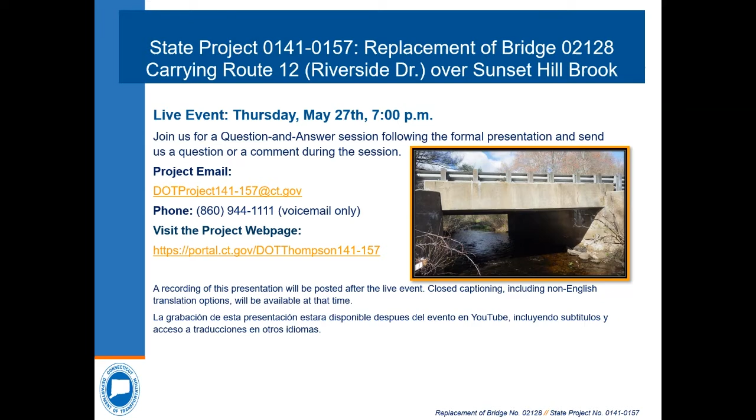Subsequently, as the preliminary design of the project has progressed, we have coordinated with the town to schedule a virtual public information meeting for the project, which brings us to this evening's public presentation. Please understand that coordination with the town, adjacent property owners, and other stakeholders will continue as we advance the project through its design.

Now I'll introduce the project's design team from the Connecticut Department of Transportation. Bart Sweeney, Division Chief of Bridges. Andy Cardinelli, the Bridge Design Principal Engineer. Again, I'm Brian Reed, the Bridge Design Project Manager for this project. And the following individuals will be presenting the project to you in a moment. Raymond Bassar, the Bridge Design Project Engineer. Mikhail Thomas, the Bridge Design Project Designer. And Matt Giannakopoulos, the Right-of-Way Coordinator from the Office of Rights-of-Way. Matt will provide an overview of the procedures followed by the department for right-of-way impacts to properties and property acquisitions.

Following the formal presentation, the project will host a question and answer session, during which time you will have an opportunity to ask the project team questions or provide comments regarding the proposed project. The project is in the preliminary design phase and is therefore subject to possible changes as the design develops. But this evening's presentation will provide you with a good overview of what can be expected. Your comments and questions are a welcome part of our design process and may serve us in the continued development of our design.

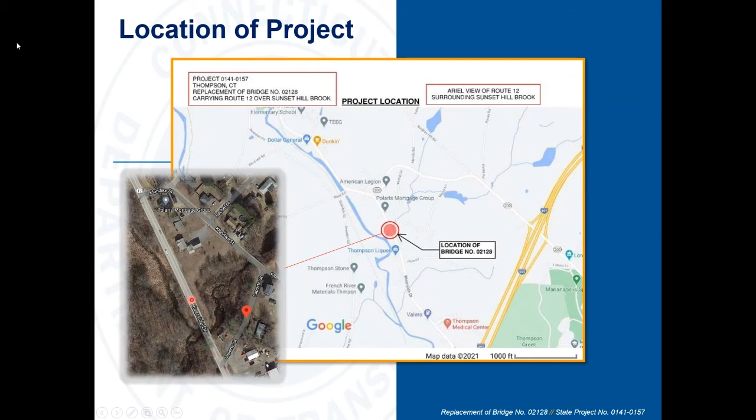What's shown on the screen is an aerial view of the site. The yellow circle shows the bridge location. The bridge is located approximately 1 mile south of Thompson School District.

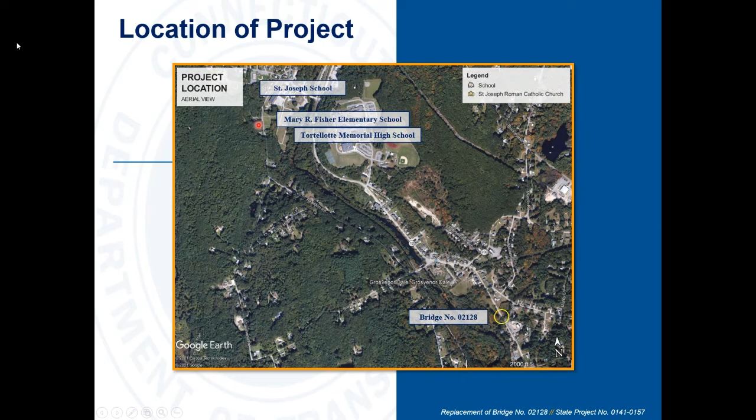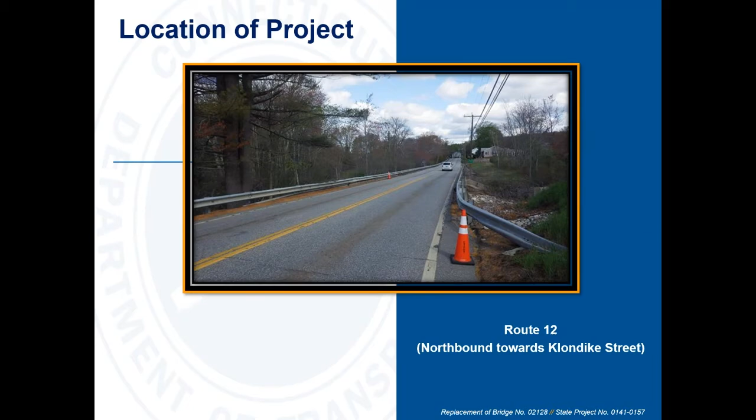The image shown on your screen captures the northbound side of Route 12 and the southern approach to the bridge. This is where the bridge is located. This is the inlet side of the bridge. The image was taken at the intersection of Laporte Street and Route 12.

This view captures the northern approach to the bridge. This is where the bridge is located. On this image, we are looking towards Laporte Street.

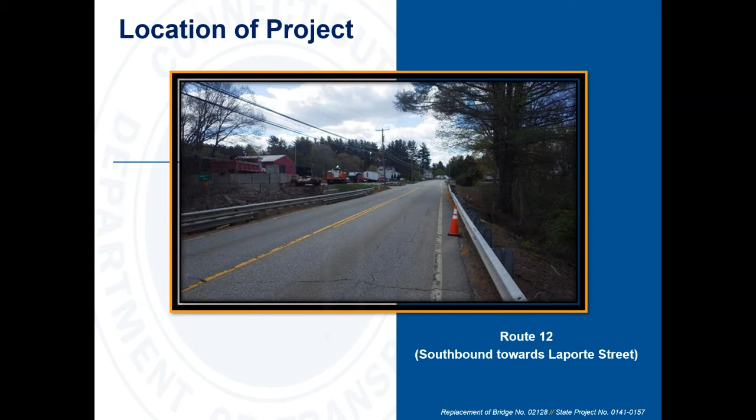Next, I would like to touch on the existing bridge data. The bridge was built back in 1922. It's almost 100 years old, a very old structure. The existing bridge consists of concrete abutments on each side, and a concrete slab spans over the concrete abutments.

In terms of the functionality of the bridge, it carries Route 12 over Sunset Hill Brook with one lane of traffic in each direction. Based on the estimate in 2015, the average daily traffic is 5,700 vehicles, of which 4% are trucks.

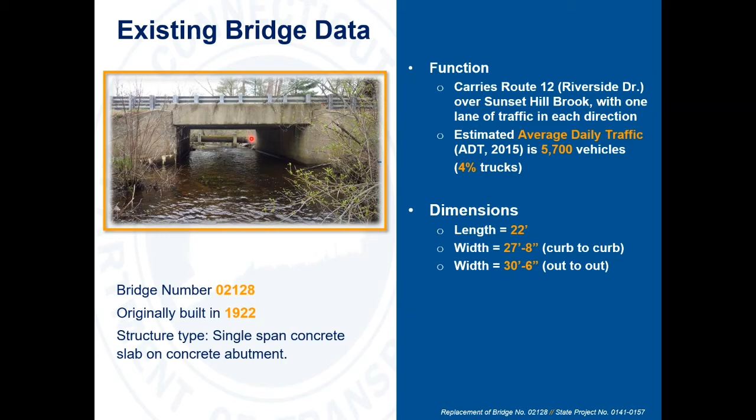As far as dimensions, the bridge is 22 feet long out to out. The overall width of the bridge is 30 feet 6 inches. The width of the paved roadway surface, from curb to curb, is 27 feet 8 inches. There is an existing sanitary sewer line that runs parallel to the bridge, which will be protected and maintained during construction activities. On this slide, I will present the condition of the existing bridge.

There are three major deficiencies associated with this bridge requiring its replacement. The first deficiency is the hydraulic conveyance area of the existing bridge. The conveyance area is shown in a blue box on this isometric view, also defined as the hydraulic opening. The current hydraulic opening is not large enough to accommodate large water passage through the structure.

Due to the proximity with the French River downstream, there is a significant amount of backwater being pushed against the structure from the river. Due to the presence of backwater, the hydraulic design criteria for the 100-year design and 500-year design check cannot be met with the current hydraulic opening. Based on the hydraulic analysis performed by our hydraulic engineers, the existing 18.5 feet of clear span between the abutment faces should be increased to 40 feet so that the bridge meets current hydraulic design requirements.

The second issue associated with this bridge is its structural condition. As mentioned earlier, the bridge is 100 years old, a very old structure. Therefore, the concrete has started deteriorating. Based on a bridge inspection performed in 2015, it was observed that there was large concrete deterioration on the underside of the concrete slab.

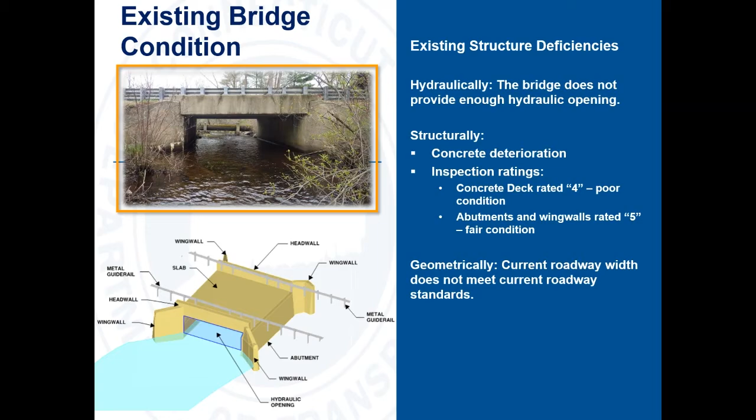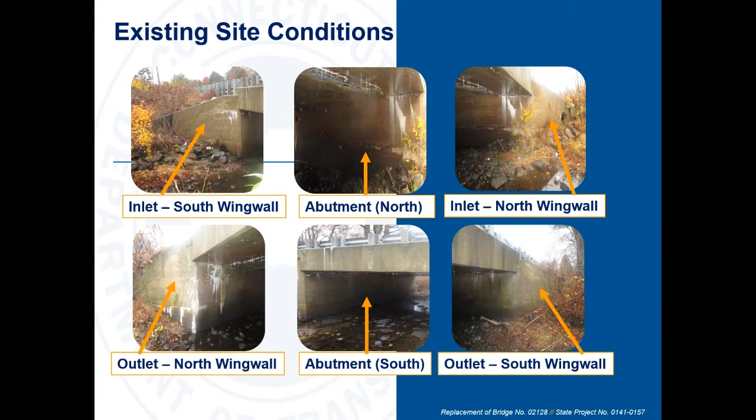There are 6 images up on your screen, taken on the underside of the bridge. These images capture the concrete deterioration, the cracks, and the exposed rebars I mentioned earlier. Our maintenance forces touched up the existing exposed rebars with zinc to prevent further corrosion.

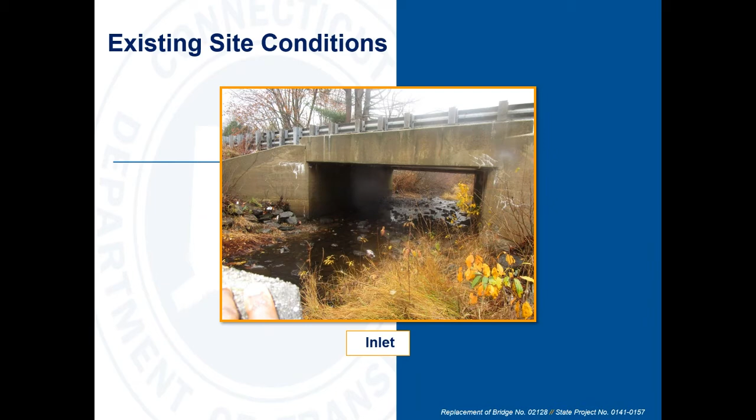From here on, I will hand off the presentation to Mikhail Thomas, the design engineer of this project, for the details of our proposal.

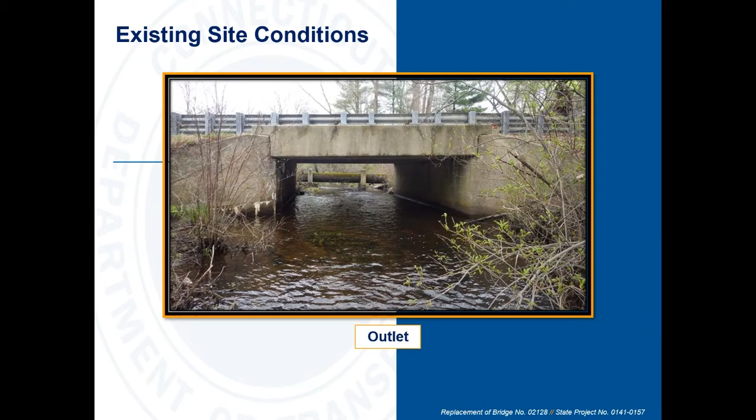Thank you, Ray. This portion of our presentation will cover elements of the design of our proposed replacement for Bridge 02128. These elements include traffic considerations, where we discuss the proposed detour; utility considerations, where impacts to relevant existing utilities are discussed; the proposed design of the bridge; the proposed construction sequence; impacts to existing right-of-way; and any environmental considerations such as required permitting.

One of the first elements of the project discussed was how traffic will be managed during construction of the bridge. The proposed signed detour for this project will utilize only state roads. It is anticipated that the official detour will be approximately 5.3 miles and take about 9 minutes to complete.

Travelers south of the bridge will continue south on Route 12 or Riverside Drive, turning onto Route 193 or West Thompson Road, then making a left turn onto Route 200 or Quaddick Road, at the end of which they will merge back onto Riverside Drive. Travelers north of the bridge will take this same detour, but in reverse order.

The purpose of the signed detour is also to prevent commercial truck traffic from using town roads. During the formulation of this detour plan, the department consulted with your town officials, who took no exception to the proposed plan.

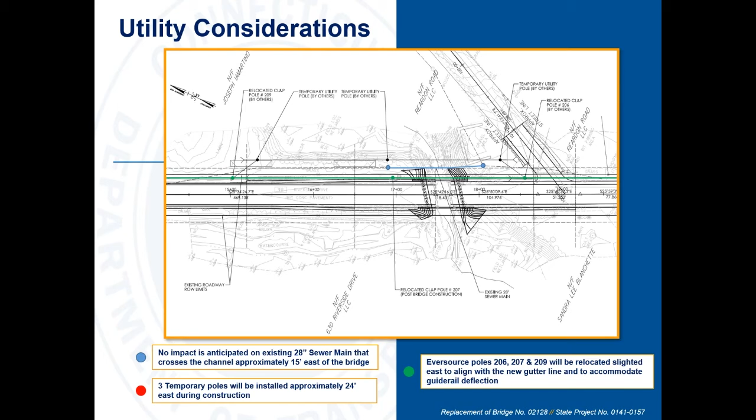Furthermore, the bridge deck is currently rated as 4, which, according to the American Association of State Highway and Transportation Officials, means the bridge deck is in poor condition. This is due to the ongoing deterioration of the deck slab and its exposed reinforcement.

Due to these factors, the scope of the bridge will be a complete bridge replacement with a single-span beam bridge consisting of pre-stressed deck units or beams that will be permanently connected to the abutments and wing walls or supports. In other words, an integral abutment bridge. In addition, the abutments, wing walls, and deck units will be precast, meaning the supports and deck beams will be manufactured off-site and then delivered to the project for placement.

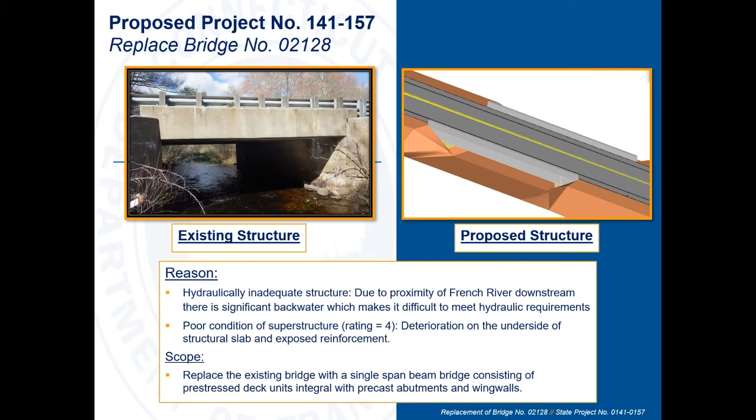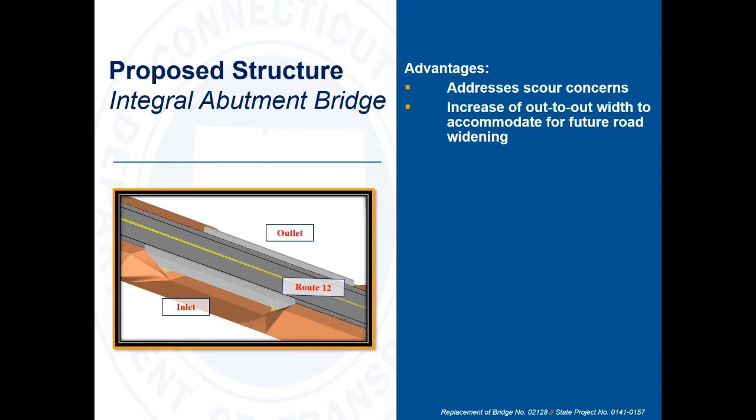There are several advantages to using our proposed design. Any scour concerns identified by the department will be addressed, meaning the soil at the edge of the abutments will be prevented from washing away as much as possible. The overall width of the bridge will be increased, therefore some future road widening can be accommodated. The proposed roadway will now include 4 feet shoulders, therefore updating the roadway to meet current highway standards.

The bridge opening will now be able to better accommodate the 100-year 24-hour storm flow, and the upstream passage of fish within the brook will be maintained as recommended by the Department of Energy and Environmental Protection. There will also be a riparian shelf at the inside face of each abutment in order for other wildlife to safely cross underneath the bridge.

And finally, integral abutment bridges by design also have fewer joints than other traditional bridge designs, therefore significantly lowering future maintenance costs.

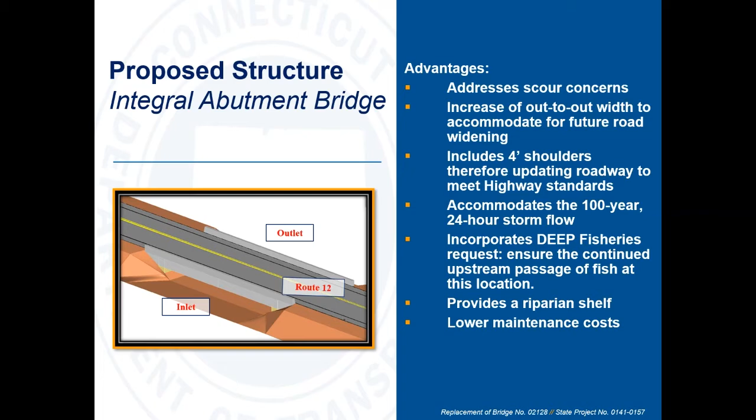Shown here is a bird's eye view of the completed bridge. The gray shaded area indicates the approximate roadway limits for this project.

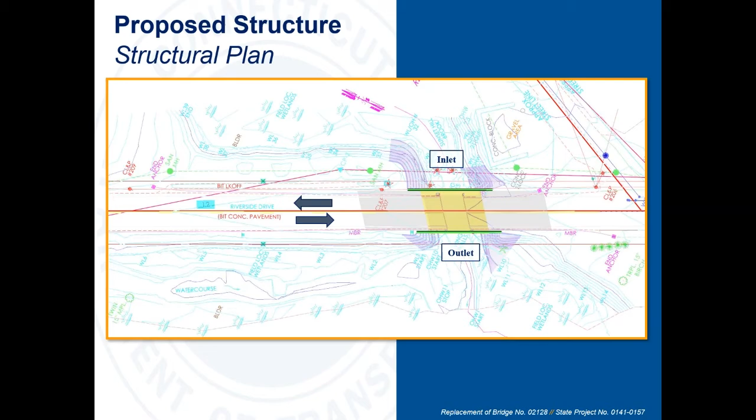This is an alternate view of the proposed structure. Here we can more clearly see the replacement bridge showing the cast-in-place single-slope parapets or barriers in green at the gutter lines of the roadway. The road itself is currently proposed to be a 4-inch thick bituminous concrete pavement and will sit on an 8.5-inch minimum thick concrete deck. Underneath the deck will be the pre-stressed deck units, which will all be supported by the precast abutments and wing walls.

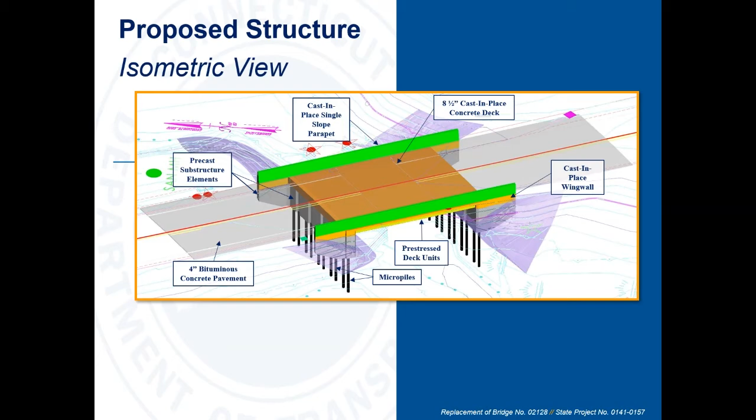Finally, as shown underneath the abutments, the entire bridge will be founded on micropiles. The purple shaded area gives an indication of what the surface of the embankments at the wing walls may look like.

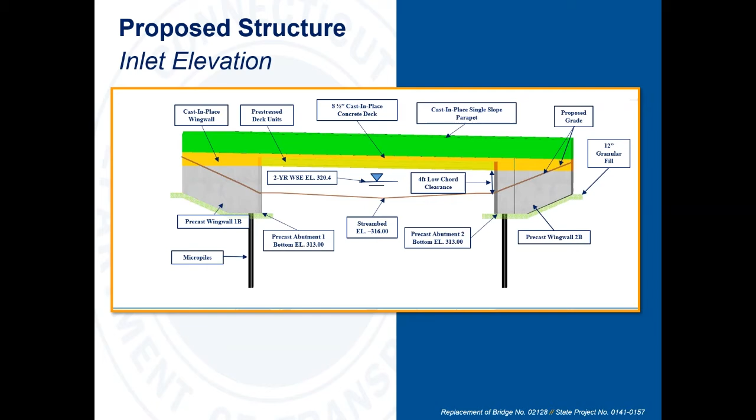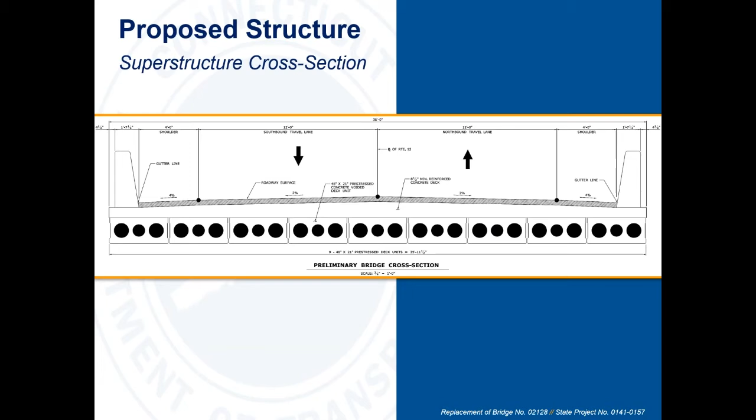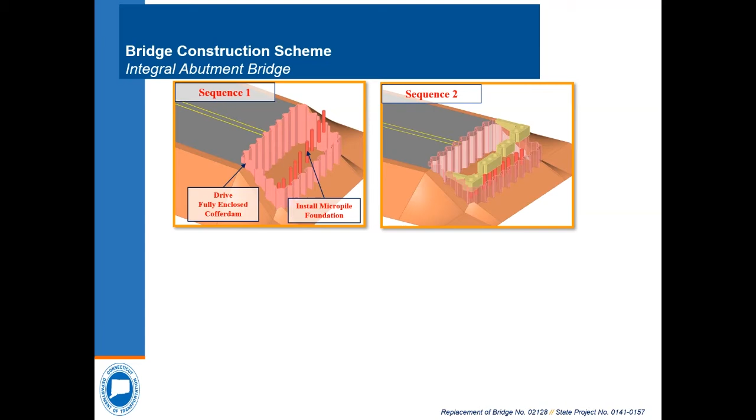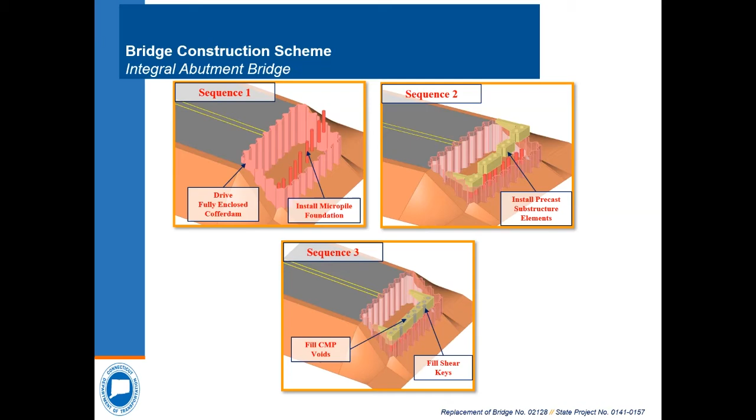After the micropiles have been installed, the abutment and wing wall pieces will be placed above the micropiles, with the exposed ends of the micropiles protruding into the voids of the abutment pieces. Then, the voids within the abutment pieces that house the micropile ends will be filled in with concrete. The spaces between each abutment piece, called shear keys, will also be filled in at this point.

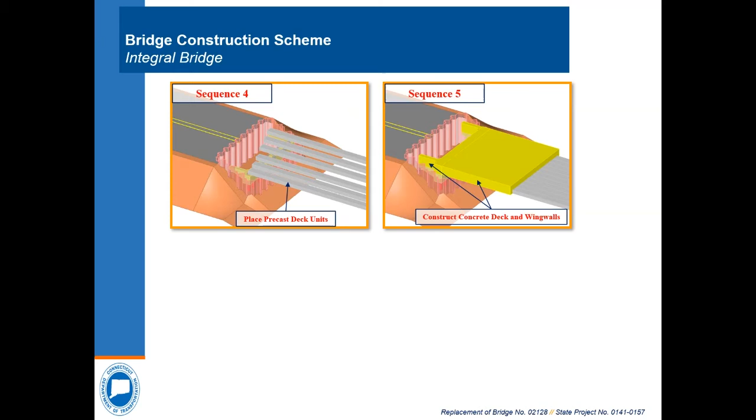Once the complete substructure is in place and concrete cured, the precast beams will be erected with each end positioned on top of the abutments. The next phase will consist of pouring the deck over the beams, encasing the beam ends in concrete, and constructing the upper portions of the wing walls. The final phase to complete the bridge will be to pave the roadway and construct the concrete parapets once the deck is in place and its concrete has attained the required strength.

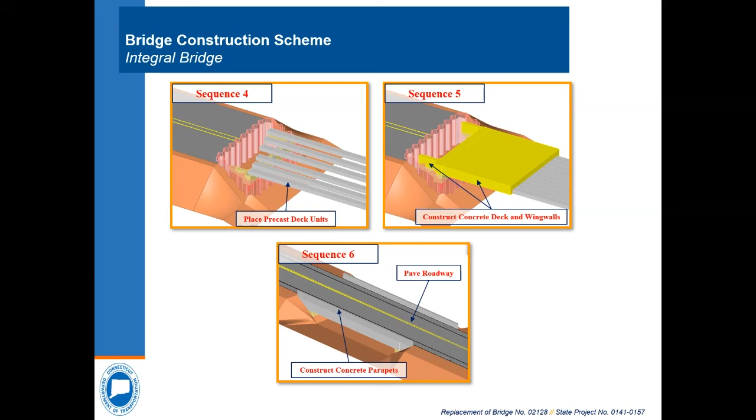We will now hear from a member of the department's Office of Right-of-Way to discuss how the department handles any right-of-way concerns. My name is Matt Giannakopoulos, and I am a project coordinator with the department's Division of Rights of Way. It is our office's responsibility to acquire the property rights needed for transportation projects.

The proposed project design requires the acquisition of property rights, so I'd like to give a brief overview of the department's right-of-way acquisition process. Please keep in mind, though, that the specific impacts are still being fine-tuned and may change as the design progresses.

Any property rights that will be required will be acquired in accordance with Connecticut General Statutes, Sections 13A-73 and 13A-98E. Whenever there is federal money used in any aspect of a project, the department must adhere to the Uniform Relocation Assistance and Real Property Acquisition Policies Act of 1970 as amended.

Once the design has moved to the point where we are ready to begin the acquisition process, each affected property owner will receive a formal letter of intent to acquire from our office, along with a property map which depicts the exact property rights to be acquired.

At that point, our office will determine the fair market value of those property rights and use that value to establish an offer of just compensation.

That offer will be sent out to the property owner in writing, and a right-of-way agent will be available to meet with the property owner and explain the project, go over the specific impacts to their property, and explain the state's offer. The property owner will have a reasonable time, typically at least 30 days, to consider the state's offer and enter into negotiations. If an agreement is reached, the state will prepare all the necessary paperwork and record the deed and the property map on the town land records.

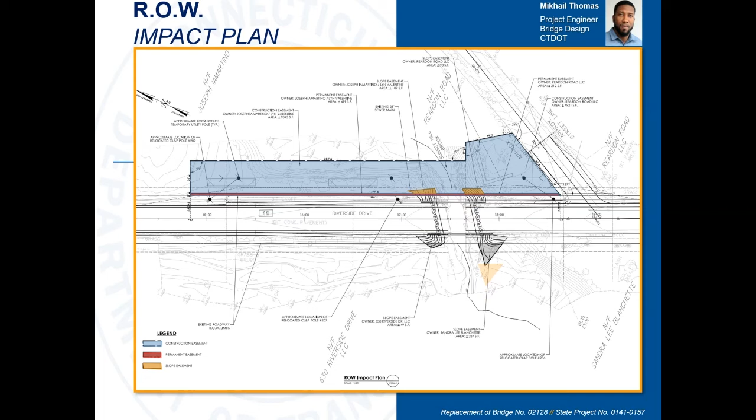The only other impact type expected would be right-to-grade or slope easements to allow for grading and stabilization of the embankments at the outside face of the wing walls, which are the orange shaded areas on the screen. These impacts only total about 550 square feet. The design team will try to keep all right-of-way impacts to a minimum as much as possible.

Now we will discuss the environmental permitting required for this project, since Sunset Hill Brook is a regulated environmental resource. Based on coordination with regulatory agencies and the expectation that the impacts to the regulated areas will be minimal, the following permits are required: a wetlands and watercourse permit, which is required for impact within a watercourse.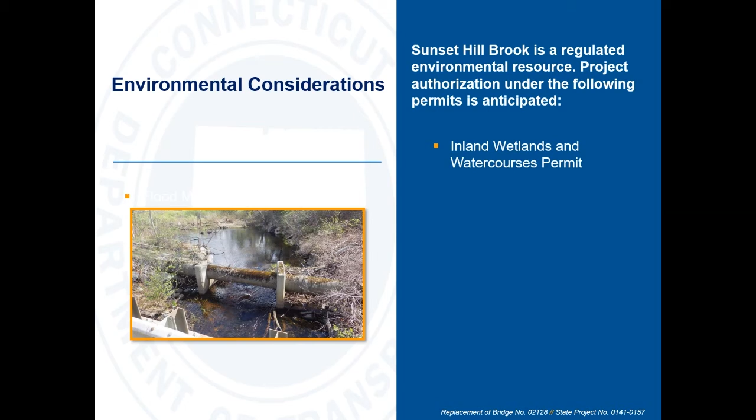A flood management certification approval for impact within any floodplain, and also a U.S. Army Corps of Engineers general permit, which, as the name suggests, is a general permit required for any construction work. And finally, a U.S. Army Corps of Engineers self-verification, which is part of the aforementioned general permit.

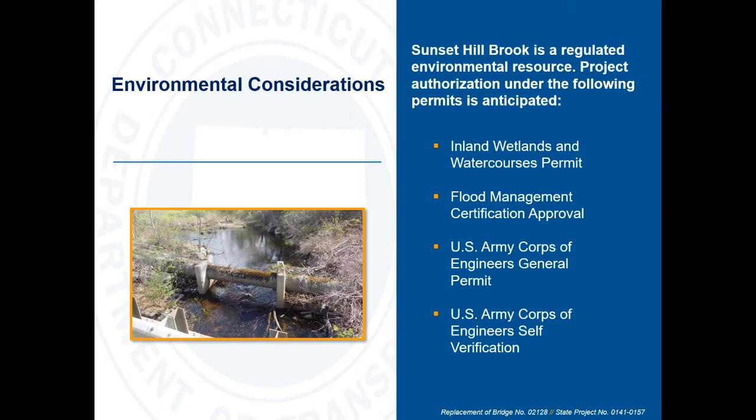As a conclusion to this part of our presentation, here is a brief overview of the project schedule. Based on the current project schedule, construction is anticipated to start in the summer of 2023.

The road closure and traffic detour will take place during the summer of 2024 for a continuous duration of no more than 10 weeks while schools are not in session.

The current estimated construction phase cost for the project is estimated to be $2.7 million and will be funded using 80% federal funds and 20% state funds.

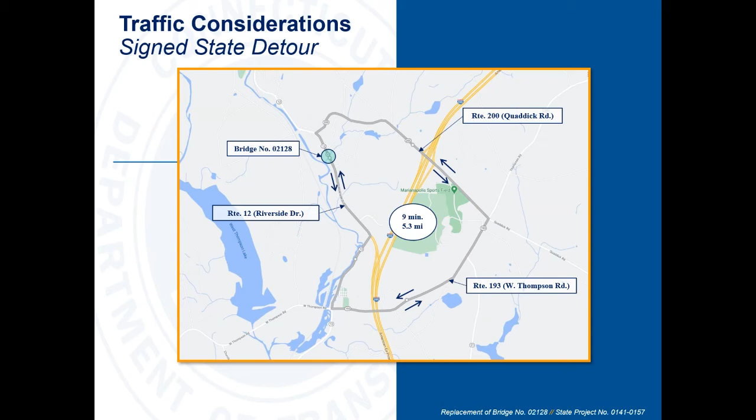Based on our coordination with our traffic design team, which Mikhail also mentioned, we will have an unsigned detour. This is not part of our official detour. As Mikhail explained, this detour is not feasible for larger vehicles such as trucks, but local travelers who know this area will be able to use Laporte Street and then Klondike Street to get back on the other side of the bridge during road closure. We also expect this detour will be utilized by emergency services, so there will be no delay in their response time. Additionally, school buses can also utilize this detour route so there will be no delay for parents getting kids to school on time.

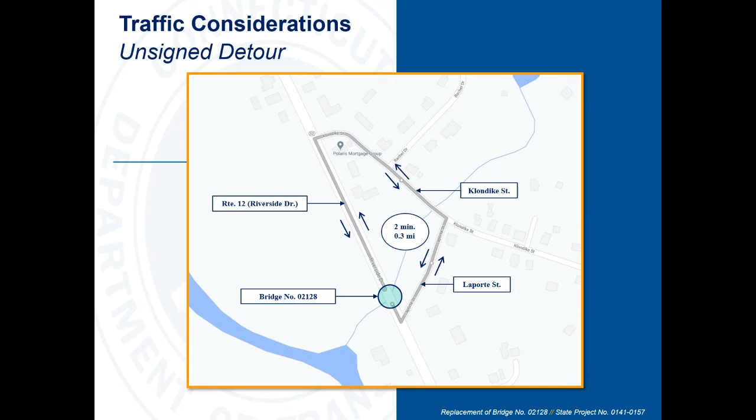We are proposing to use all precast concrete components as well as pre-stressed deck units to complete the substructure and some portion of the superstructure of our bridge. Only the deck is going to be cast in place, which means it needs to be constructed on site. Considering these accelerated bridge construction techniques, which we have utilized over and over in the state, we have confidence that with a road closure of 10 consecutive weeks, we will construct the bridge and reopen the road to traffic. Outside of that 10-week closure, we may need to do some additional work outside the bridge limits, such as landscaping or restoration of the utility poles to their permanent locations, as Mikhail Thomas has shown.

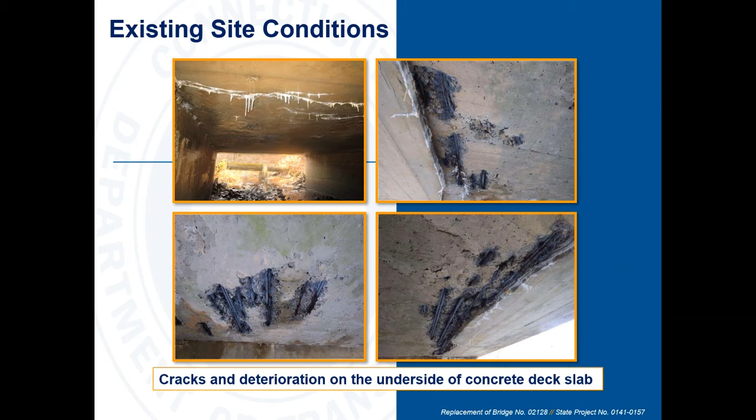Another question: can you explain the reason for the delay between the start of construction and the beginning of the road closure? Sure, go right ahead, Raymond. Thank you, Brian, absolutely.

During the prime construction of the bridge, the contractor will most likely utilize larger cranes to install all the heavy precast concrete components. The delay is due to the fact that the work needs to be done prior to bridge construction, which will allow our contractor to mobilize.

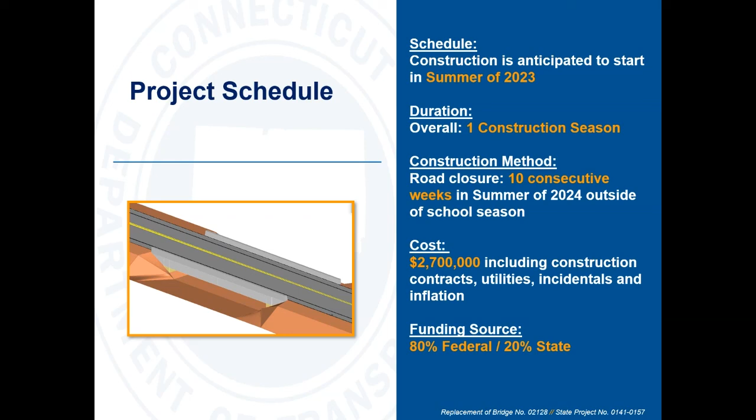During the acquisition process, our property agents will reach out to the property owners and kindly ask them if they have any special vegetation they've planted, or any trees they would like to keep. They may ask us not to remove that for privacy purposes. So this will all be informed by our right-of-way property agent during the acquisition process.

Matt, would you like to provide more insight on this question? Yeah, absolutely, Raymond. This is Matt Giannakopoulos, I'm from the Department's Division of Rights of Way. Like Raymond said, the construction easement areas needed during the project get restored at the end of the project, usually just by turf establishment and reseeding any grass.